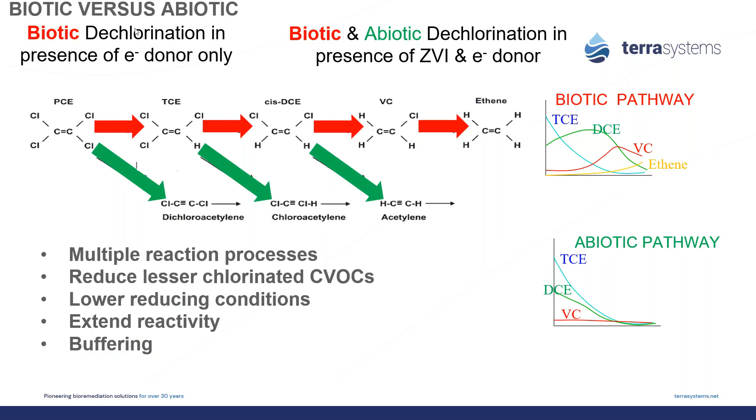In terms of selecting a ZVI particle for your particular site, a key issue is the remediation objectives. For hotspot treatment areas, we're looking typically at a smaller ZVI particle, down in the 4 micron range, for rapid reaction. For permeable reactive barriers, where we want persistence for an extended period of time, we'll typically recommend a larger ZVI particle. The largest ones we're using today is about 125 microns. Of course, the smaller the ZVI particle, the larger the surface area for reaction, and the reaction rates increase accordingly.

We've been experimenting also with some combinations of different particle size irons.

One of the key learnings over the last years is the sulfidation impact on the reactivity of the iron, which Mike is going to go into in far more detail. And with that, I'm going to turn it over to Mike.

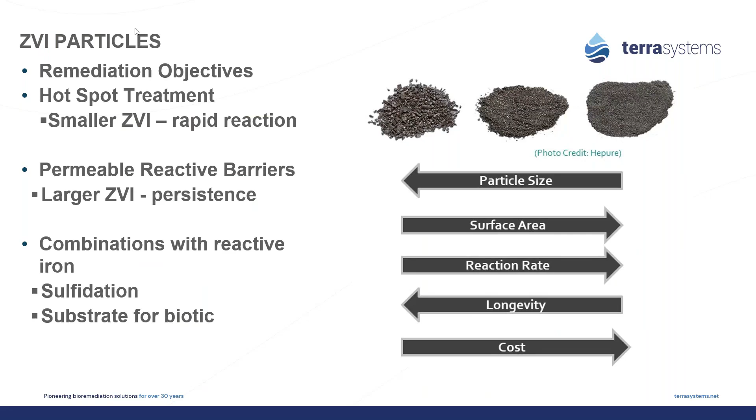Thanks, Dick. So we'll be talking today about some laboratory batch and column studies and then some case histories. We're going to compare different sulfidated zero valent irons, different loadings of the iron and the substrates, incubation times, a variety of different contaminants, and with and without bioaugmentation cultures.

As Dick pointed out, for chlorinated ethenes, we're going from tetrachloroethene to trichloroethylene to cis 1,2-dichloroethylene. Often we see a little bit of trans 1,2-dichloroethene generated in that degradation product, and then it's going to vinyl chloride and then finally to ethene and ethane.

Chlorinated methanes, starting with carbon tet, removing a chlorine to form chloroform, dichloromethane, and then chloromethane.

Also talking about chlorinated ethanes, 1,1,1-trichloroethane, 1,1,2-trichloroethane. Those are degraded to 1,1-dichloroethane and 1,1-dichloroethene. Typically, when we see 1,1-dichloroethene, it's at sites that had the TCA, the chlorinated ethanes. We don't really see it very often at sites with just PCE or TCE. And the next step in the chlorinated ethane degradation is chloroethane.

We're also going to talk a little bit about some brominated methanes: bromoform, dibromomethane, and bromomethane. And then brominated ethanes, ethylene dibromide, 1,2-dibromoethane, and that goes to bromoethane.

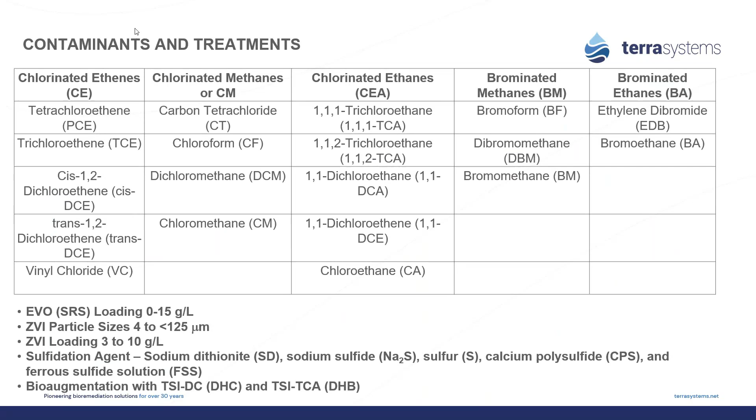So we'll talk about EVO loadings between 0 and 15 grams per liter, ZVI particles between 4 and less than 125 microns, loadings of ZVI between 3 to 10 grams per liter, sulfidation agents. I'll talk about this a little bit extensively: sodium dithionite, sodium sulfide, sulfur, calcium polysulfide, and then the ferrous sulfide solution. And then also bioaugmentation with either Dehalococcoides or Dehalobacter.

So the first study we did was with just groundwater or with water. It was spiked with a mixture of PCE, 1,1,1-trichloroethane, 1,2-dichloroethane, carbon tet, and bromoform.

So we have treatments including a control, SRS plus the bioaugmentation culture. The larger ZVI particles, less than 125, were added at about 10 grams per liter. And then one of the treatments we added 0.7 grams per liter of sodium sulfide.

We also have smaller ZVI particles, 44 micron, with and without the sulfidation agent, and then combinations with our emulsified oil and the ZVI. Everything's about 10 grams per liter of the ZVI and up to 15 grams per liter of the EVO. We bioaugmented most of the treatments.

For PCE, we're seeing removal of greater than 90% shown in green. However, the 44 micron with sulfide, and a little bit less for the other ZVI products.

The best treatments for the 1,1,1-trichloroethane were the 44 micron ZVI with sulfide, and the SRS with 125 micron ZVI and sulfide.

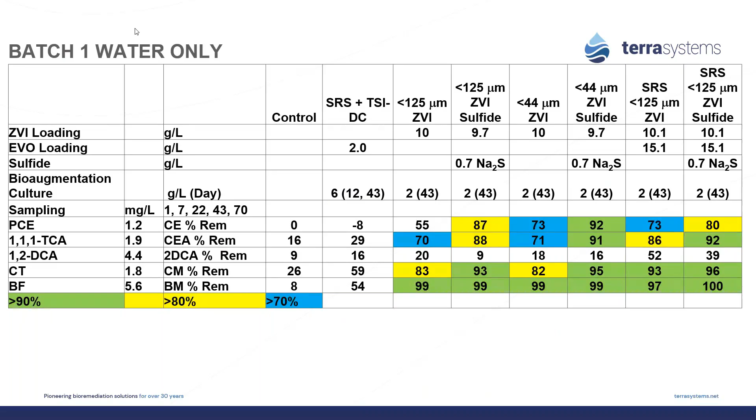The next is the soil slurry system, soil from a site, about 43% by weight. We had control, 4 micron ZVI alone, and ZVI with sulfur, SRS, our emulsified oil with 4 micron ZVI with and without sulfur, and then also a treatment we did bioaugmented.

The loadings here were about 10 to 13 grams per liter of EVO, and a little bit lower loadings of the ZVI between 3.1 and 6.7 grams per liter. The TSI-DC was added at about 1.7 grams per liter, and the sulfur at a fairly low concentration of 0.2 grams per liter. We're seeing almost complete removal of the trichloroethane with the 4 micron ZVI with and without sulfur, and in the treatment with the SRS and bioaugmentation culture.

Pretty good removal again for the TCE, up to 99%. And the chloroform, again, pretty much the same group of compounds gave you the best removal. The boxes in green are 90%, in yellow 80%, and 70% for the blue.

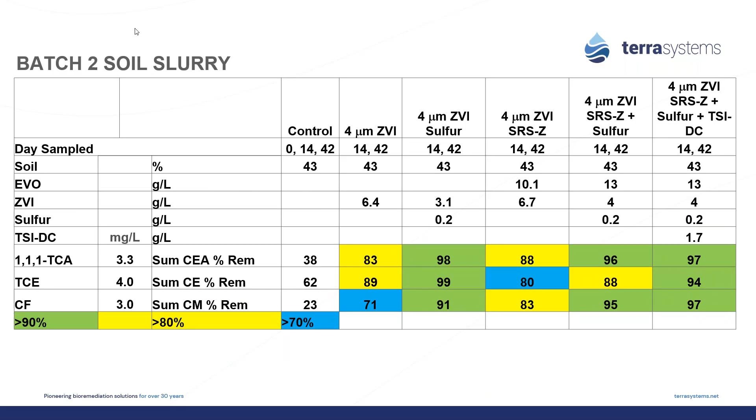The third batch test, again with just groundwater, the treatments included a control, 4 micron ZVI, less than 125 micron ZVI, 44 micron ZVI with sulfide, and then the combination of the SRS and the 44 micron. Most of the loadings of ZVI were about 10 grams per liter, with EVO loadings of about 15.

In this study, we used sodium dithionite as the sulfidation agent. This study was only sampled over 28 days, so a little bit shorter reaction period, and may not have been long enough to see more complete degradation. Started at between 0.84 milligrams per liter of carbon tet up to a maximum of 4.2 of ethylene dibromide.

For PCE, we saw the maximum removal with 4 micron ZVI alone. For 1,1,1-trichloroethane, that also did the best, and then the treatment with the 44 micron with sulfide. Carbon tet ranges between 64 and 79%. Bromoform showed almost complete removal with the different ZVI particle sizes, and then very good removal of the ethylene dibromide.

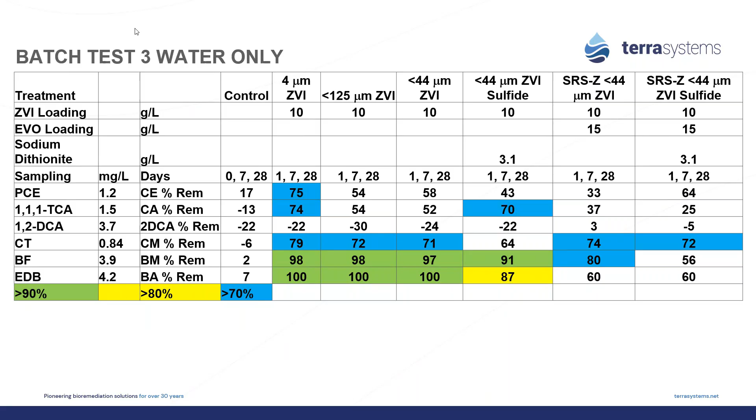The next test was with groundwater. The treatments included a control, SRS plus the ZVI 4 micron with dehalococcoides. We've added sulfate as a way to generate more sulfidation. And then we also had treatments with low SRS, moderate SRS, and moderate SRS with the dehalococcoides. These were sampled over 84 days.

We're seeing TCE transformations up to 99.99% with the moderate SRS plus dehalococcoides. We're seeing transformation of the DCE, and in some cases, say in the control, we're seeing that we're losing the vinyl chloride, probably to abiotic reactions such as volatilization. But we're seeing good removal of the vinyl chloride with the SRS, ZVI, and sulfate, and the treatments with the SRS plus Dehalococcoides.

The sum of the chlorinated ethenes removal for the treatments with the SRS and sulfate and the SRS and Dehalococcoides range from 97.8 to 99.8%. And a little bit lower concentrations of chloroform, again seeing very good removal for many of those treatments, a little bit better for the treatments with the ZVI than just the SRS.

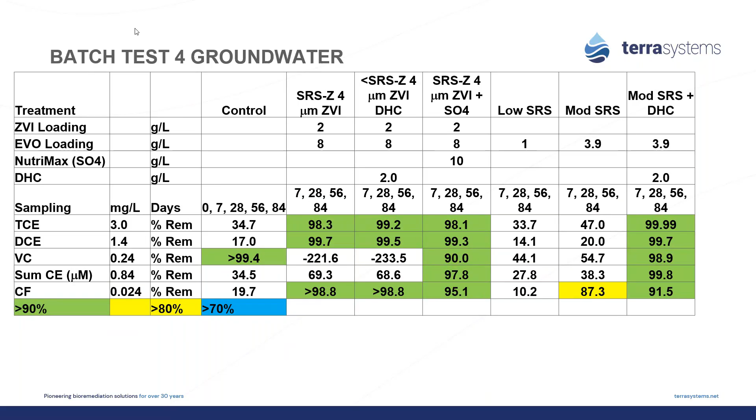So in conclusion, the ZVI or EVO plus the ZVI did better typically than the EVO and bioaugmentation in these batch studies. In a field situation, I think we're going to probably see more degradation with the EVO and bioaugmentation cultures. We see that the ZVI and sulfidation agents increased the PCE and TCE degradation with good removal of the 1,1,1-trichloroethane, carbon tet, chloroform, bromoform, and ethylene dibromide with ZVI alone. And again, 1,2-dichloroethane was not treated as effectively.

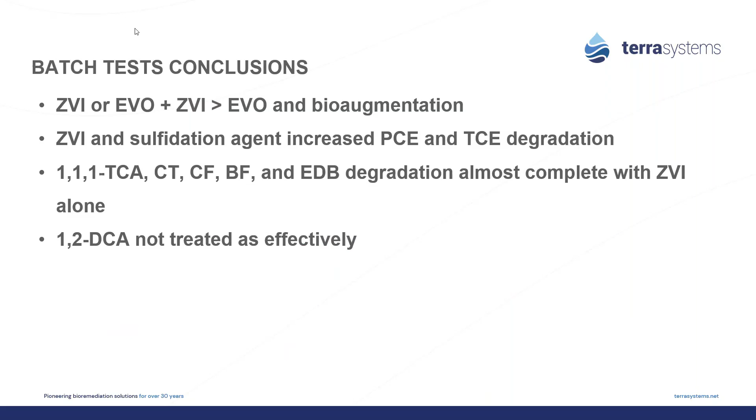A variety of different sulfidation agents can be used. We've pretty much settled on the ferrous sulfide solution. It's easy to handle, it shows us good reactivity and longevity. So it's really what we're preferring or recommending, and it's easy for us to work with. It typically requires a low sulfur to iron ratio, and the sulfidation can work with the small, more reactive ZVI to moderate ZVI particles.

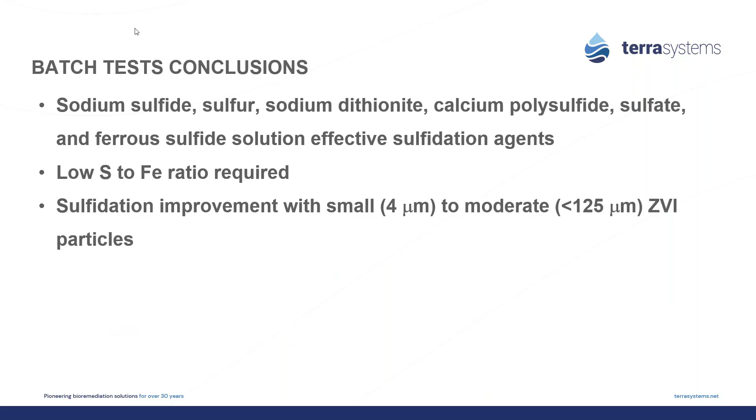We also used one of the biotraps from Microbial Insights. These were in situ microcosms that were baited with two different products. We have the SRS-Z sulfidated with augmentation culture and added a magnesium buffer, and then a treatment that was not sulfidated. And so we're looking at the numbers of Dehalococcoides and the reductases for TCE and vinyl chloride, the TCEA and the BVCA and the VCRA.

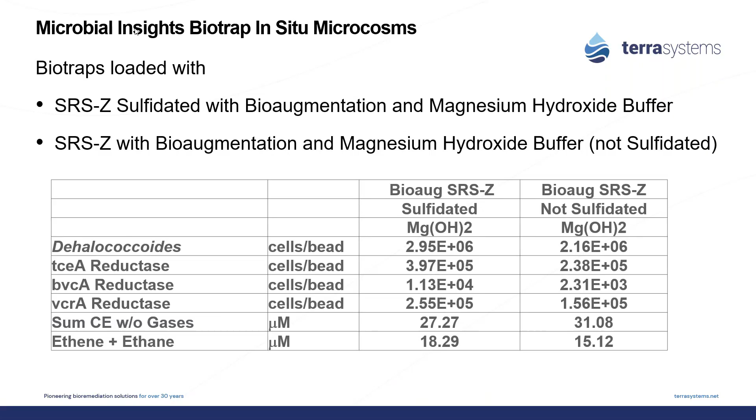Comparing the two different products, the sulfidation treatments have a little bit higher concentrations of Dehalococcoides and the reductases genes. We're seeing lower concentrations of the chlorinated ethenes in the sulfidated treatment versus the non-sulfidated treatment, and higher production of ethene and ethane. So again, in a field situation, we're seeing the value of the sulfidation agents.

Next, talk a little bit about a couple of different column studies that we've done. This is a column test that we did use with 130 micron ZVI, which were added at about 42 grams per kilogram, about 4% by weight. And we use calcium polysulfide as a sulfidation agent.

In these studies, the retention time on the column was about 6.1 to 13 days. Initially, with the medium ZVI shown in black, we're seeing almost complete removal of the chlorinated ethenes on the left. And then over time, that extent of the degradation drops off, but we're seeing 99% removal of the chlorinated ethenes with the calcium polysulfide treated ZVI, and also for the chlorinated methanes we're seeing very good removal.

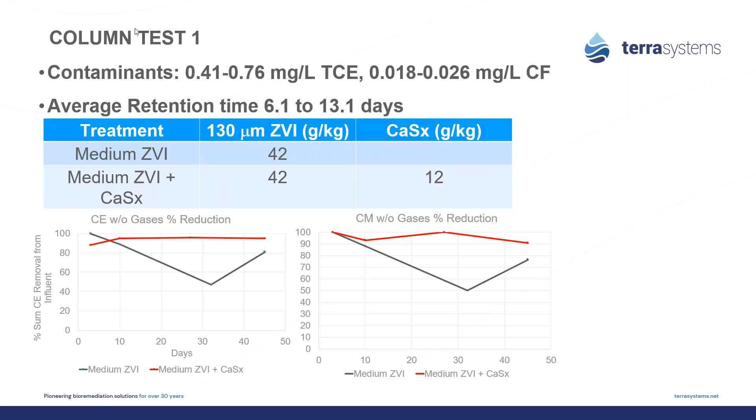Column test 2, we had 5 different columns. We had about 10 grams per kilogram of ZVI with a low ferrous sulfide. We did treatments with the SRS plus ZVI with 15 grams per kilogram of SRS, 10 grams per kilogram of ZVI with a low ferrous sulfide solution and higher ferrous sulfide solutions, to try to see what impact changing the ferrous sulfide solution might have.

These studies were run at a retention time of about 1.6 to 2.8 days. We did augmentation on day 15, and on day 17 we added some additional ferrous sulfide to the influent for all the columns.

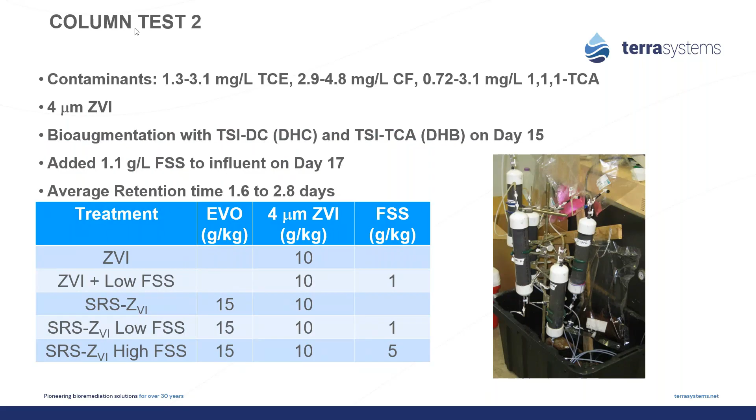So we're running upflows from the columns and collecting the effluents in Tedlar bags. This shows the results for the chlorinated ethenes, the overall removal percentage, all the way to ethene.

We're seeing the best treatment with the SRS Z plus the low ferrous sulfide. Good removals with the treatments with the SRS, low ferrous sulfide and high ferrous sulfide, much better than the treatments with just the ZVI and the SRSZ without the sulfidation, which showed 50 to 80% removal.

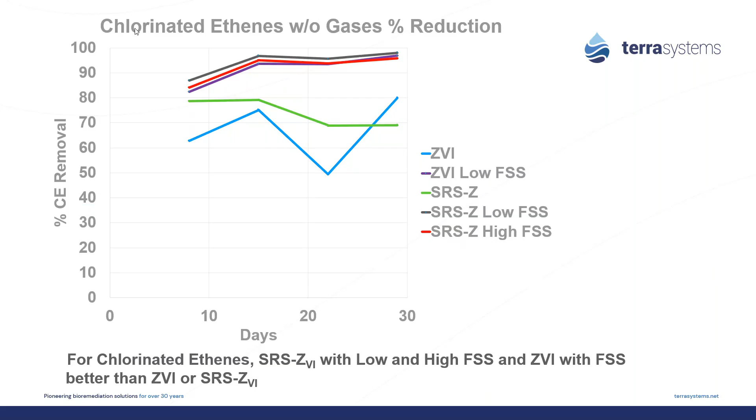Chlorinated ethanes again showed poor response without the sulfidation agents. In this particular set of compounds, the ZVI with the low ferrous sulfide gave us a little bit higher removal than the other treatments.

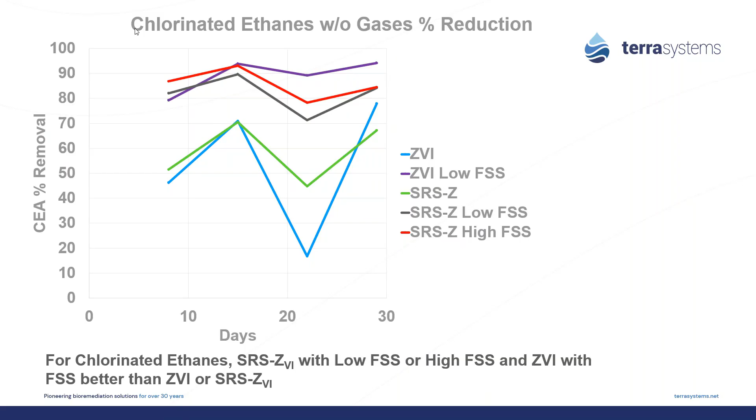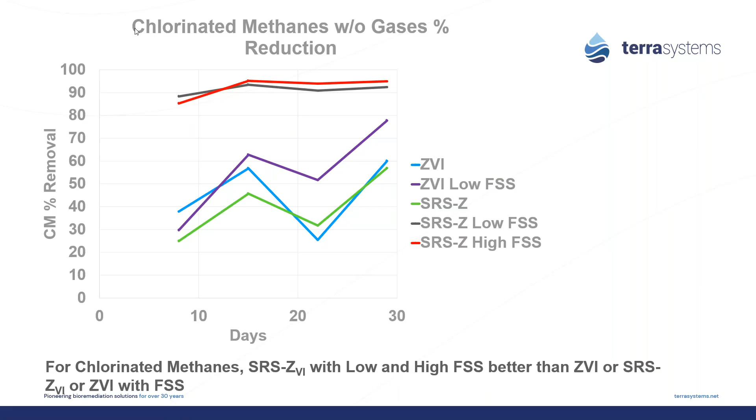So in conclusion for this particular column study, showing the components, retention times range between 2 to 2.9 days. We're seeing TCE removal of up to 98% with the SRS plus sulfide, low ferrous sulfide, and this is an average concentration over the time period.

We're seeing the chlorinated ethenes overall being reduced by up to 94%. The time to the TCE maximum contaminant level of 5 micrograms per liter ranged between 2.8 days to 11.8 for the ZVI. The 1,1,1-trichloroethane concentrations were between 0.7 and 3.1 milligrams per liter.

The best treatment, again on average, was the SRS-Z plus low ferrous sulfide, followed closely by the treatment for the SRS-Z plus the high ferrous sulfide. The time to reach the MCL for those was about 0.8 to 4.9 days.

We're seeing a little bit better removal of the parent TCA than we are the total chlorinated ethanes. For chloroform, we're up to 98% removal on average with the SRS-Z plus the low ferrous sulfide, and we're seeing up to 92% removal of the total chlorinated methanes in those treatments. There's no MCL for chloroform, so we don't have a projection for time to reach that number for chloroform.

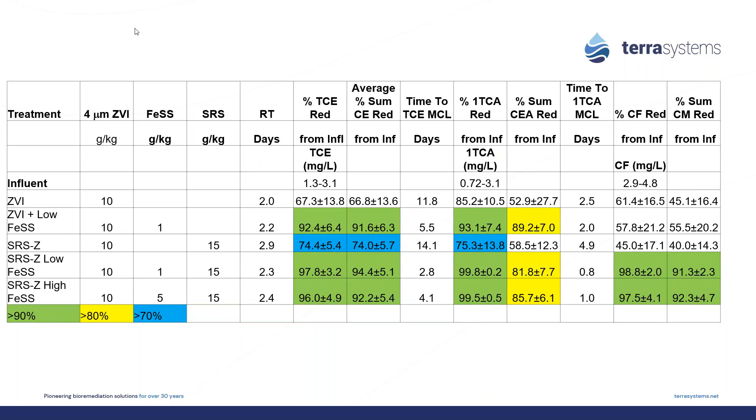In conclusion, the ZVI and SRS ZVI treatments with ferrous sulfide were better than the treatments without the ferrous sulfide solution. The SRSZ with the ferrous sulfide gave the highest treatment of TCE, 1,1,1-trichloroethane, and chloroform over time. The bioaugmentation and the ferrous sulfide in the influent seemed to increase dechlorination at that last time point.

We're seeing somewhat less chlorinated intermediates with the ferrous sulfide addition to the iron, and enhanced VOC dechlorination extent and degradation rates with the sulfidated ZVI.

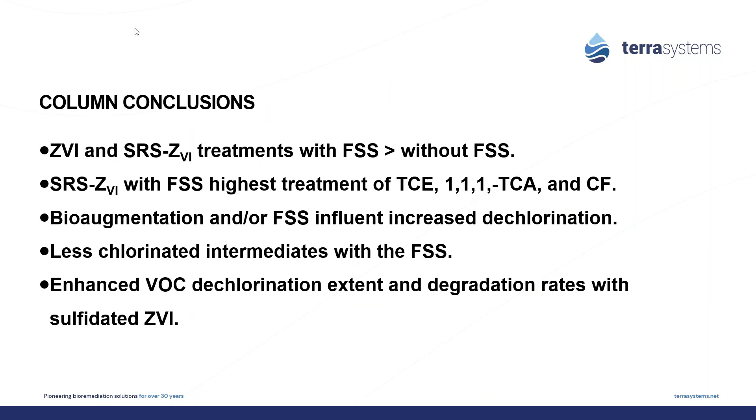I'm going to give you a couple or three different case histories. This is a project in New Jersey. There was a former manufacturing facility that's been closed for a number of years, and they wanted to redevelop it and put in a building that would generate funds for the county and the city. So we're dealing with overburden and bedrock impacted with chlorinated VOCs and 1,4-dioxane.

The 1,4-dioxane was primarily dealt with using in situ chemical oxidation. There's really not much degradation of 1,4-dioxane under anaerobic conditions. Primary VOCs were trichloroethene and 1,1,1-trichloroethane. The overburden is a silt and fine sand, and then a sandstone bedrock.

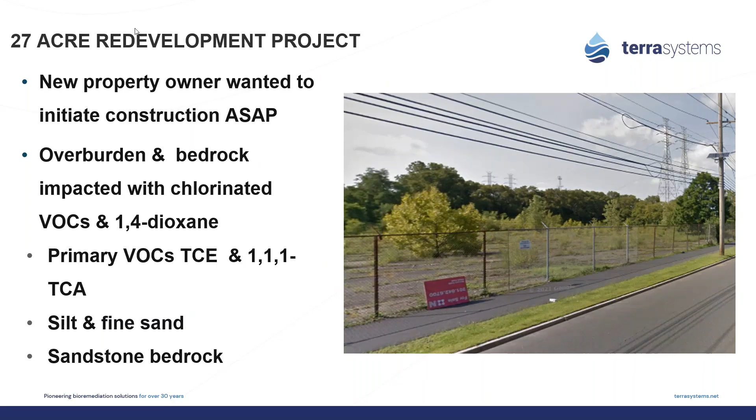So this is in the overburden. There are two areas of concern. The seepage velocity ranged between 2 and 40 feet per year.

We used a variety of different products at this particular project, from a small droplet EVO, the SRS SD that has a particle size of about 0.6. We had an EVO plus sulfidated ZVI, with 4 micron bioaugmentation with both the Dehalococcoides and Dehalobacter.

In this particular project, we also added a nutrient blend that contains nitrogen, phosphorus, and sulfate, and that sulfate is going to help generate the ferrous sulfide. These were injected into the overburden with direct push.

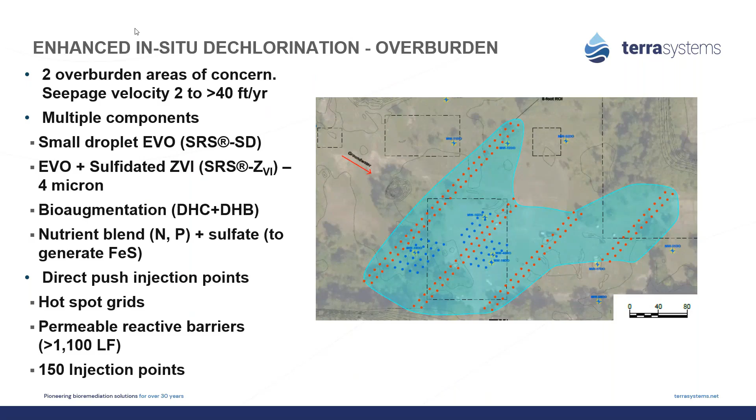So we have hot spot grid shown in blue, and then permeable reactive barriers shown in orange. There's about 1,100 linear feet of permeable reactive barriers, a total of 150 injection points. So this shows the results for some of the wells.

MW17DO, we're seeing 98% removal of the chlorinated ethanes over the two years of monitoring, seeing up to 98% removal in MW13, and even 80 feet down gradient in MW31, we're seeing 99% removal of the chlorinated ethanes.

So we're seeing a combination of biological degradation with the production of DCE and vinyl chloride, whereas at MW13D, we're seeing more of an abiotic signature with the simultaneous reduction of the cis-DCE and TCE, although we do see a little bit of vinyl chloride shown in pink. These graphs are shown on a micromolar basis.

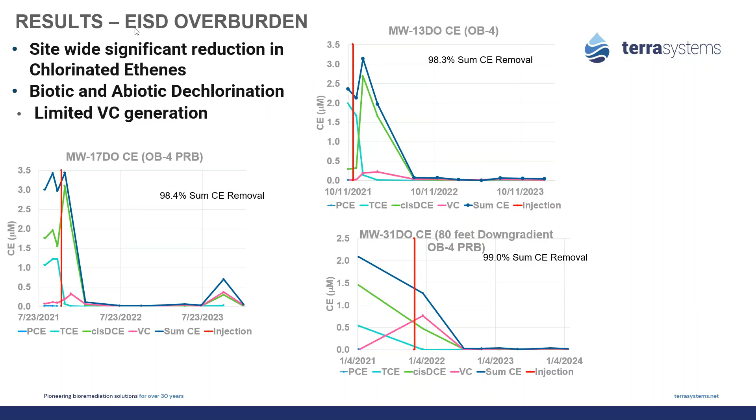For the chlorinated ethanes, we're starting with 1,1,1-trichloroethane, and we're generating some chloroethane in MW13 or 17DO. We're seeing only about 6.3% removal of the chlorinated ethanes as the chloroethane is persisting, but there is some evidence at the latter time frames that it's starting to come down.

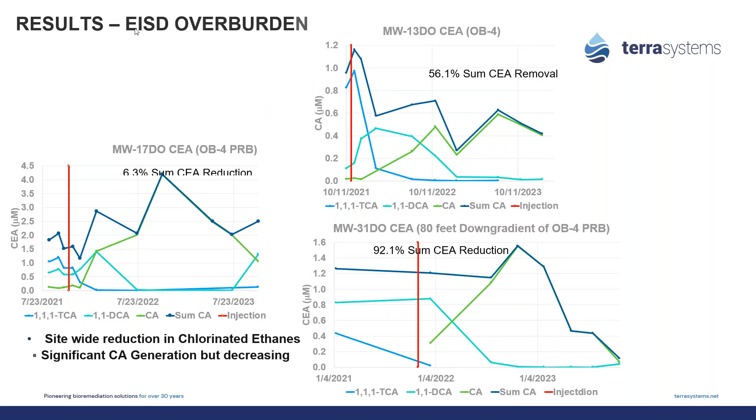We're seeing degradation rates for chlorinated ethanes between 6.3 to 92.1% in the overburden. In the bedrock, focused on treating fractures, we used a large droplet EVO that's retained more in the fractures. We used 2 different types of EVO and sulfidated ZVI: 11% of a 4 micron to generate more rapid degradation, and 89% of the 44 micron to give us a little more longevity and also a lower cost point.

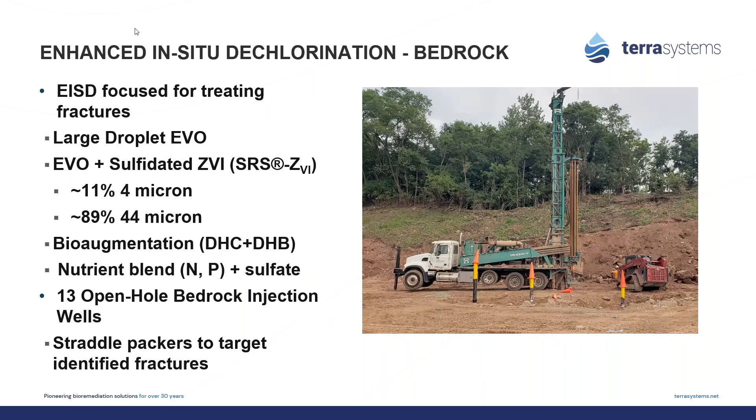Bioaugmentation with Dehalococcoides and Dehalobacter, along with the nutrient blend of nitrogen, phosphorus, and sulfate. These were injected into 13 open hole bedrock injection points using straddle packers to target identified fractures.

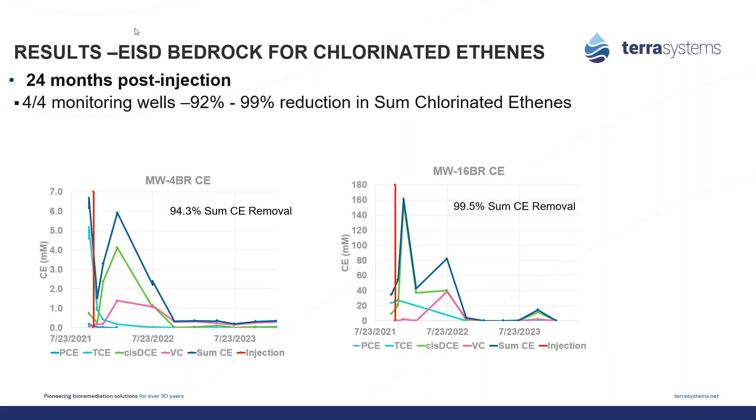So over 24 months, MW4BR is seeing 94.3% removal of the chlorinated ethenes, and 99.5% in 16BR. So very good removal of the chlorinated ethenes. Chlorinated ethanes actually saw better removal in the overburden, up to 88.8% in MW4BR and 99% in 16BR. Again, we're seeing some production of daughter products, but then the chloroethane concentrations are coming down.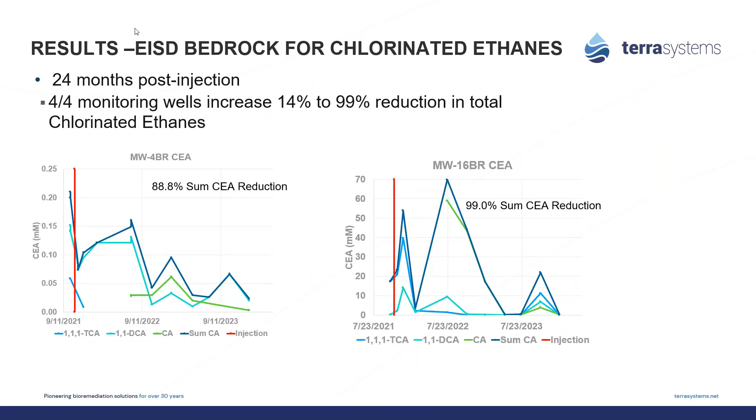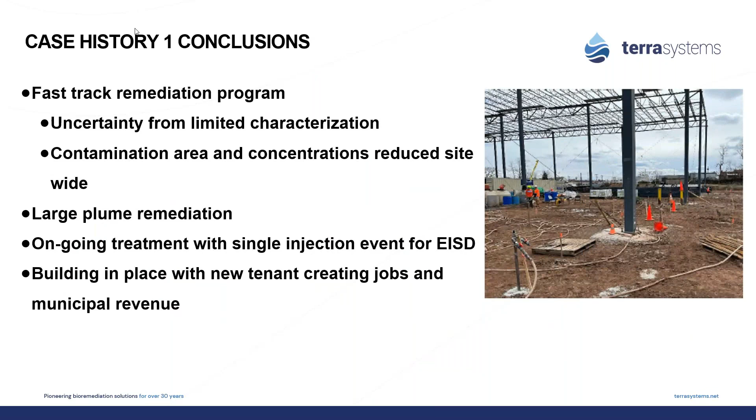In conclusion, this was a fast-track project. There was some uncertainty from the limited characterization up front. The contamination area and concentrations were reduced site-wide. We treated a large plume with ongoing treatment from single injection events for enhanced in situ dechlorination, enabling construction of a building and new tenants, creating jobs and municipal revenue.

The next case history is a contaminated site on Long Island that extends from 10 to 80 feet below ground surface. It's an overlying sand with a confining clay at the bottom, with DNAPL PCE found at the clay surface. The objectives were to inject into the top foot of clay and the 4 feet of overlying sand to treat that DNAPL, using a material that would stay in place and not wash out.

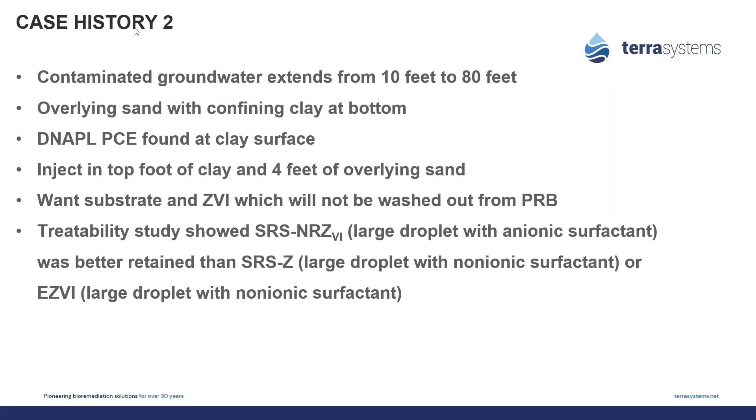A treatability study done by others showed that the combination of SRS NR ZVI—a large droplet with an anionic surfactant—was better retained than our standard SRSZ product with a large droplet and non-ionic surfactant, or the combination of EZVI, which is soybean oil, surfactant, and ZVI without the nutrients. So the SRS NR worked better for this particular treatability study.

A pilot was done into 2 wells, IW 101 and 102, injecting about 7,400 pounds of sulfidated SRS NRZVI, 20%, 4 micron. It also added some additional sulfidated 5 micron ZVI and glycerol, 3,000 pounds of sodium bicarbonate, 10 liters of the TSI DC bioaugmentation culture, and 10 pounds of sodium ascorbate, which we use to generate reducing conditions for the bioaugmentation culture, for a total injection volume of about 5,900 gallons.

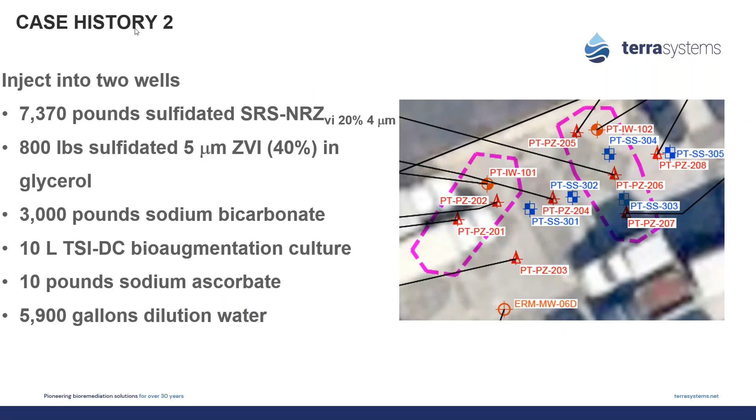This shows the maximum TOC around both injection points. We're up to 11,500 milligrams per liter around IW 101, with pretty good distribution out to well 201 at 1,300 milligrams per liter. Around IW 102, up to 21,000 milligrams per liter of TOC, also with pretty good distribution. The chlorinated ethane data shown on the right shows 90 to 99% removal around IW 101, and up to 98% removal around IW 102.

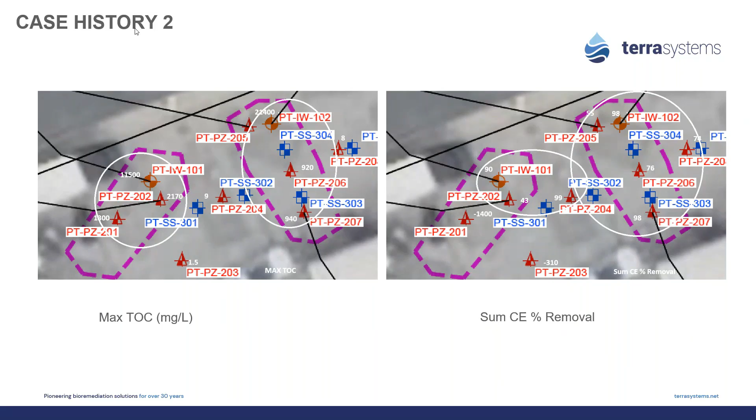The next slide shows a little more data. We're seeing TOC distribution around 101, though the injection volumes there were a little lower, only getting about 2,000 total gallons of material in. We're showing TOC concentrations up to 11 feet out from that point, with not quite as much removal of the chlorinated ethanes at well 201.

We do see pretty good degradation of the chlorinated ethanes at well 204. There's also some 1,2-dichlorobenzene present at the site, and we're seeing good treatment of that in well 204, which was the only one that showed it around 101. Around injection well 102, we saw up to 21,000 milligrams per liter of TOC.

We're seeing distribution of TOC out to 18 feet from that point, with good removals of the chlorinated ethanes of 55 to 98%. Again, good removal of the chlorinated ethanes except at well 208, and some degradation evidence for 1,2-dichlorobenzene also.

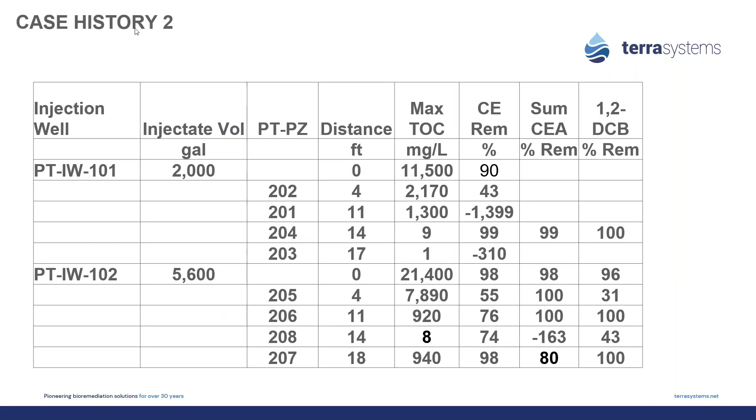So the lab study showed the custom blended SRS ZVI with the anionic surfactant and ferrous sulfide solution stayed in place, promoted chlorinated ethane degradation where TOC distributed up to 11 to 18 feet from the injection points. There's evidence for chlorinated ethanes and 1,2-dichlorobenzene destruction, and a full-scale system design is underway, and we expect that to happen later in the fall of this year.

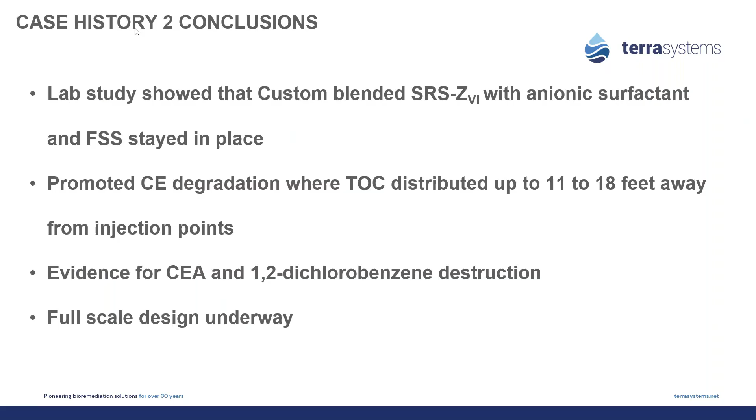The third case history is a site in Central Florida. We're dealing with 3 zones: an A zone, which is 28 to 38 feet below ground surface, primarily sand. Between 37 and 55 feet is the B zone, which is a sandy clay, and underlying that, between 65 and 75 feet, is a limestone bedrock.

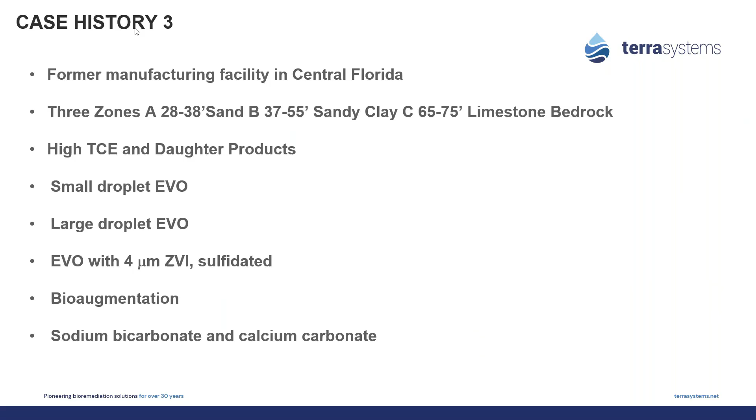So we're seeing high TCE and daughter products, using a combination of small droplet emulsified vegetable oil, large droplet emulsified vegetable oil, the 5 micron material, and the EVO with the 4 micron ZVI sulfidated, bioaugmentation, and then a combination of sodium bicarbonate and calcium carbonate as buffers.

In the A zone, the SRS FRL, the large droplet material, was injected in the surrounding areas, shown in purple. And the green is the EZVI, which in this case was actually the SRS ZVI. So a total of 37 points injected on a 5-foot radius of influence with the SRS ZVI, and 31 for the FRL.

In May 23, they came back and did some additional injections of the SRS FRL to some of the zones that had not received as good treatment before.

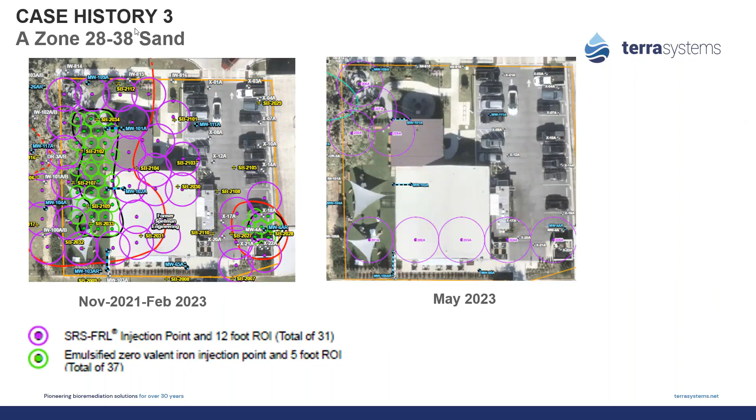They looked for the presence of the EVO in wells that were collected about 10 feet from the injection point at depths of 10 to 15, 15 to 20, and 20 to 25. They saw the EVO in the soil cores, and they also took samples, diluted them 1 ounce of soil to 3 ounces of water, and saw the EVO in the water standing over those. They also looked for the EVO and EZVI in the soil, and were able to detect that.

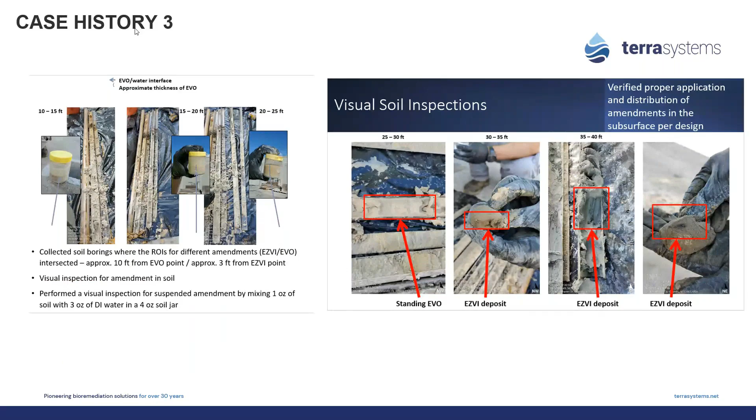This is the results for the A zone, 28 to 38 feet below ground surface, and MW101 that was treated with the SRSZ. We're seeing 44% removal of the chlorinated ethenes with a maximum of about 1,800 milligrams per liter of TOC. We do see some increase in vinyl chloride and some chlorinated ethenes at the final time point, data collected in December of '24.

So it appears that some additional amendments might be valuable here. In MW104, which was treated with SRS, we're seeing 86% removal of the chlorinated ethenes. We're not seeing a lot of vinyl chloride being produced in this particular well.

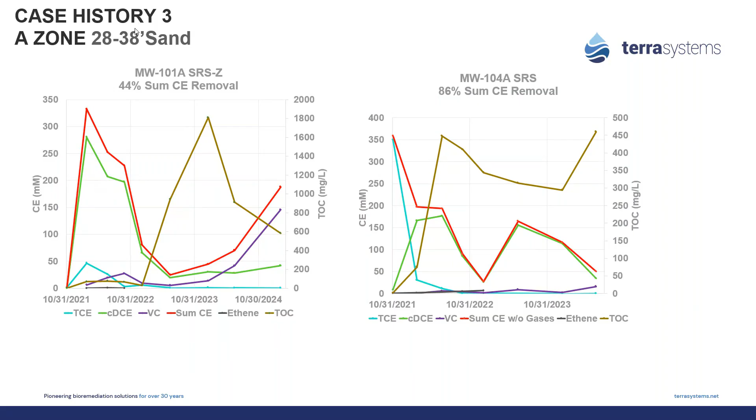And then the B zone, the sandy clay, between 37 and 55 feet below ground surface, did both combinations of the SRS FRL, the large droplet, on a 12-foot radius of influence, a total of 21 injection points, and then the small droplet SD.

These were injected with an angle approach to try to get underneath some of the roads, in areas that weren't accessible for direct push injections. So in May '23 we came back and did some additional injections of the FRL, and then also in February '24.

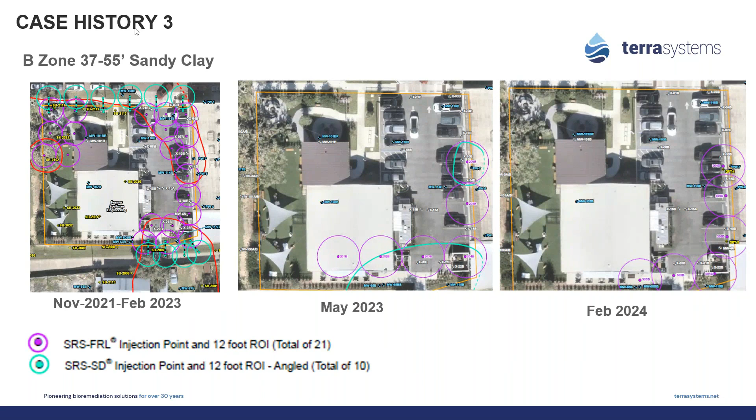These show the results for MW101, treated with the SRSZ. Overall, 99% removal of the chlorinated ethenes, up to 250 milligrams per liter of TOC, shown in the gold line. We do see some ethene generation shown in the black line on the left, although the data was not collected for ethene after that time point in MW101.

MW65B with SRS, we're seeing up to 2,000 milligrams per liter of TOC, and an overall removal of the chlorinated ethenes of 73% from the peak concentrations.

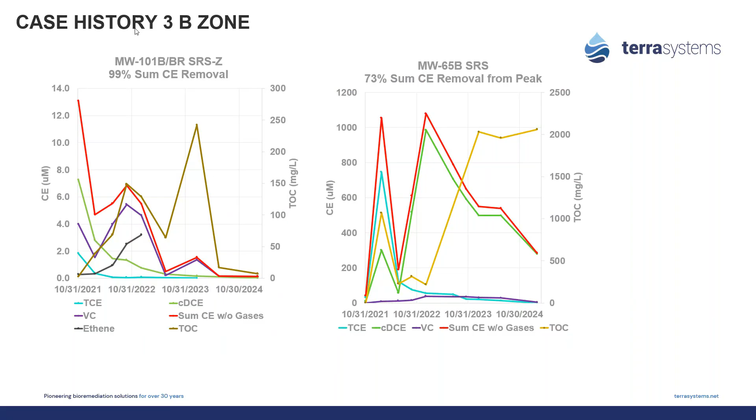In the limestone bedrock, high concentrations in certain areas, and that's where they used the EZVI on a 5-foot radius of influence, total of 4 injection points, and the surrounding area around that used the FRL. So additional injections in May 2023.

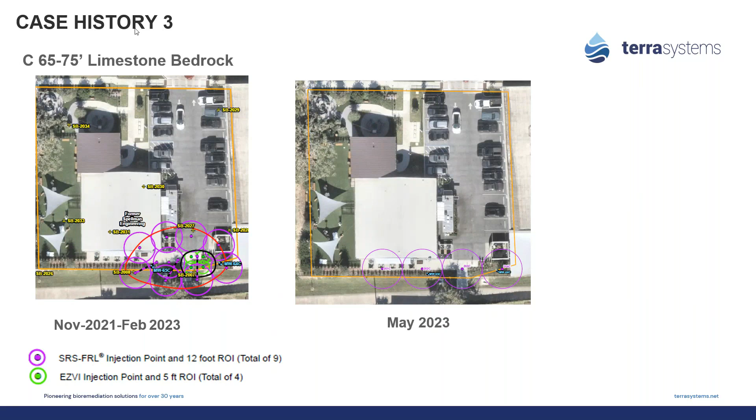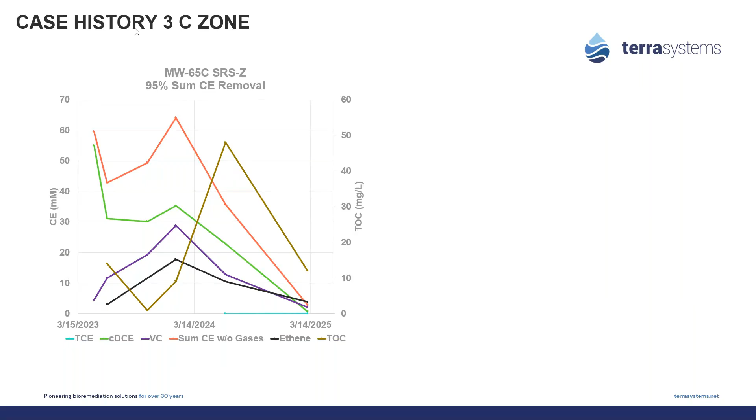So good treatment in all 3 zones. The A zone, we're seeing a decrease in the sum of the chlorinated ethenes ranging from an increase of minus 484% to a decrease of 99%, and well 103A appears to have DNAPL concentrations, which cause the concentration to come up. The B zone had a decrease of up to an average of 67%, ranging between 0 and 100%. And then the C zone ranged from 20 to 95%, average of 58%.

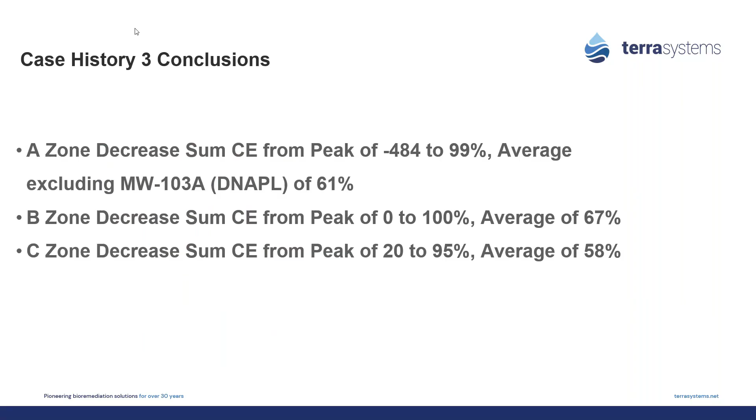So in conclusion, sulfidation increases the reactivity of the ZVI. It works with a variety of ZVI particles. Several forms of sulfur are effective, can be used with EVO and bioaugmentation, and the case history showed the effectiveness.

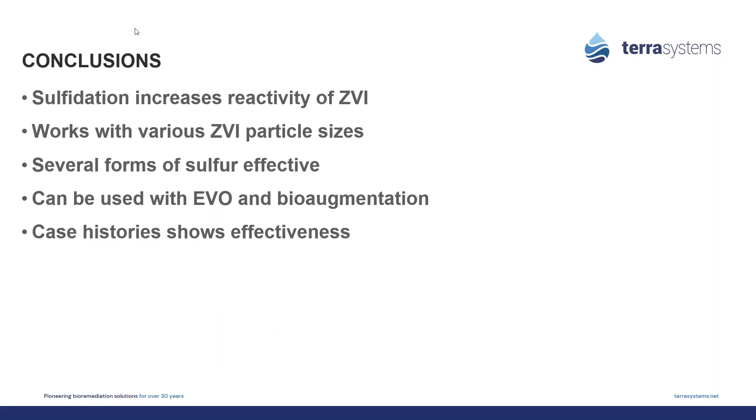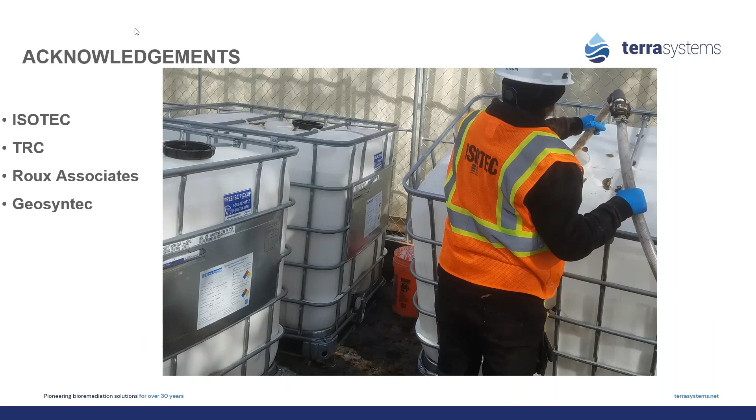Of this approach, I'd like to acknowledge some of the companies that provided the information for the case histories: ISOTEC, TRC, Roux Associates, and Geosyntec.

And at that, I'd like to be willing to take any questions that you might have.

Great, thank you so much, Dr. Lee, for this talk. I really appreciate seeing these kind of combined approaches, both the abiotic and biotic pathways. I see it not only as not putting all of your eggs in one basket using these multiple strategies, but it's even more like getting your eggs in baskets to work together, right? So thank you for your expertise and your insights on that.

As far as questions, we are getting a lot of comments about this educational talk and everything that folks have learned from it. But to jump into Q&A, first, could you mention which sulfur additive you said that you were recommending? We just had a speaker who missed it, so we wanted to clarify.

We're primarily using the ferrous sulfide solution. It comes to us pre-mixed, so we just add that with our emulsified vegetable oil and ZVI powder. It has worked well for us in both our batch and column studies as well as field projects.